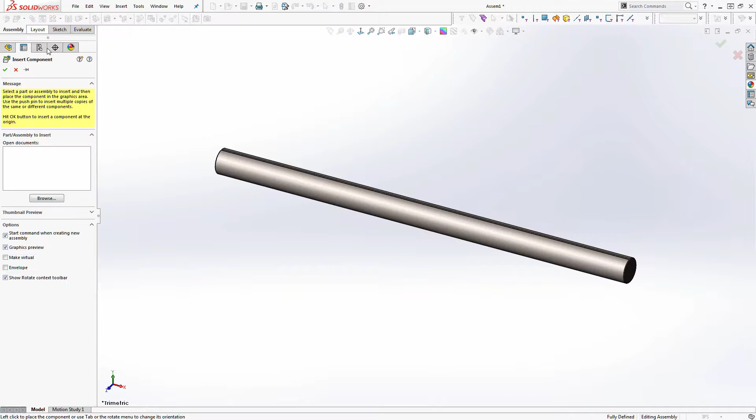So one of the things I don't have figured out yet is how I'm going to tension this thing exactly. I've got these keepers, and I'm going to get my blocks and all kinds of stuff on here. I wonder if I can select more than one thing.

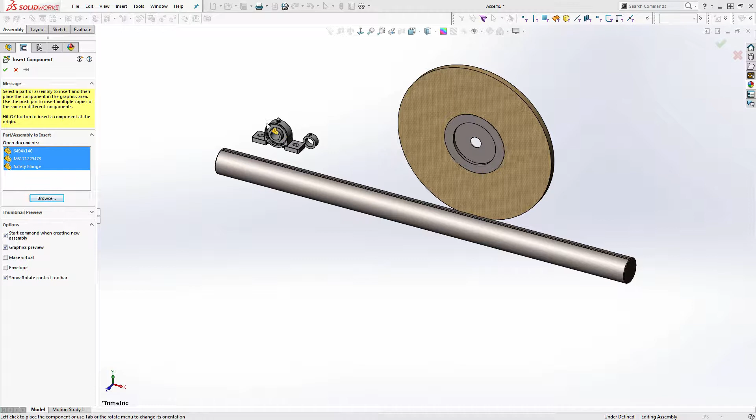Hey, look at that. Honestly, I've never done that before, selected multiple parts. That's awesome.

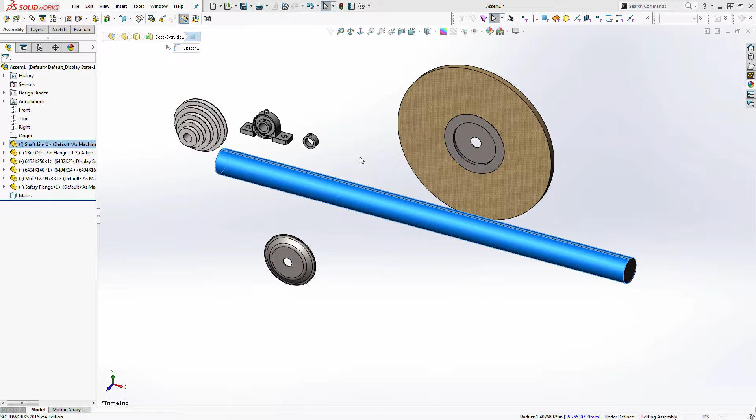It keeps asking me if I want the as-machined or as-welded state for the weldments that I made, and they're not real weldments. So this shaft, if you remember, one of the things I forgot to do last time was size this shaft, so we'll do that real quick. Obviously this is a 1-inch diameter shaft. And my keyway looks better now.

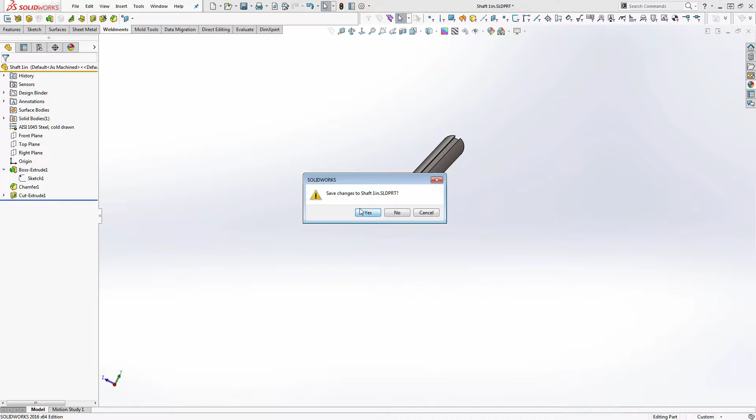So we'll go ahead and start plopping stuff on the shaft here. Let's see, did that go the correct direction that I want? Yeah, I want the set screws on the inside. And mount the pulley.

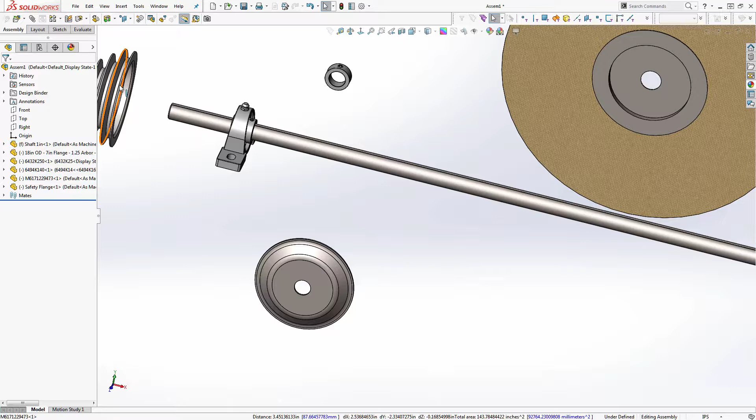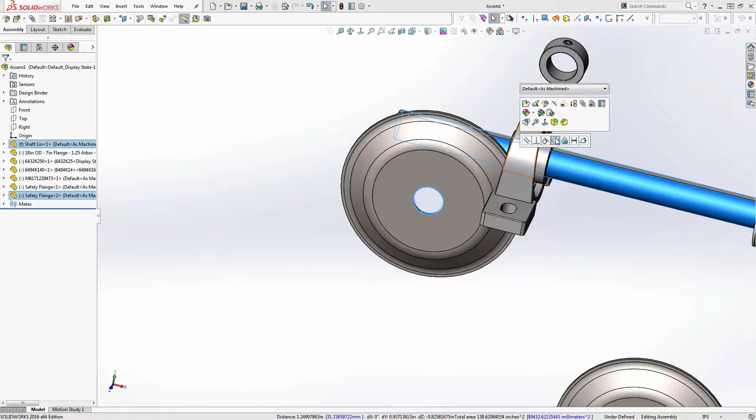Block. Wait a minute, do I just want to mirror it? Maybe I'll mirror that. Now these keepers, what we've got is I need 2 of those per side. These keepers are going to go - hey, it went the right way, love it. So my keepers are going to go up against the safety flange, and I don't know whether or not this key is going to be enough to keep it in place.

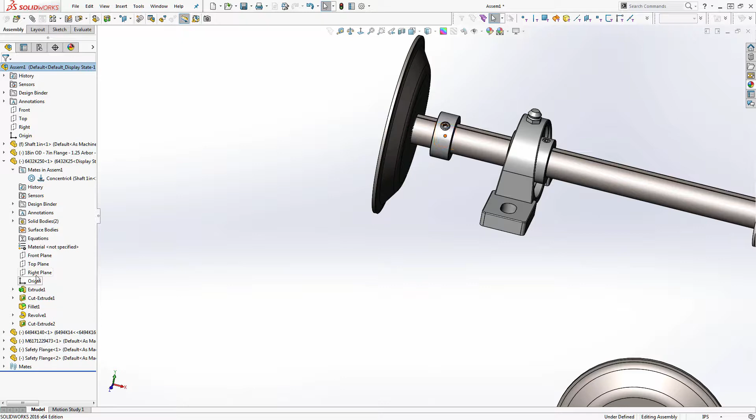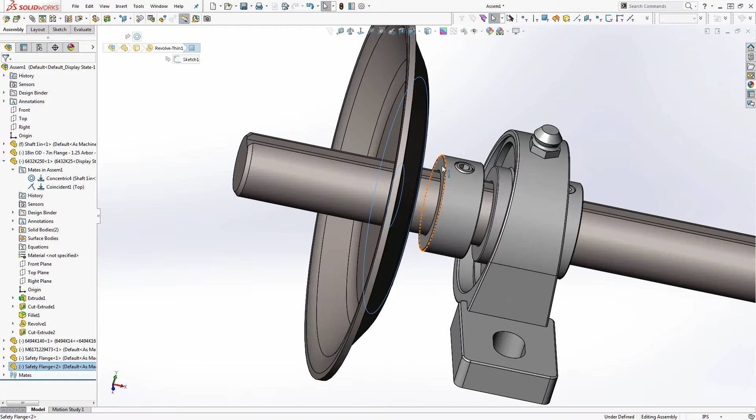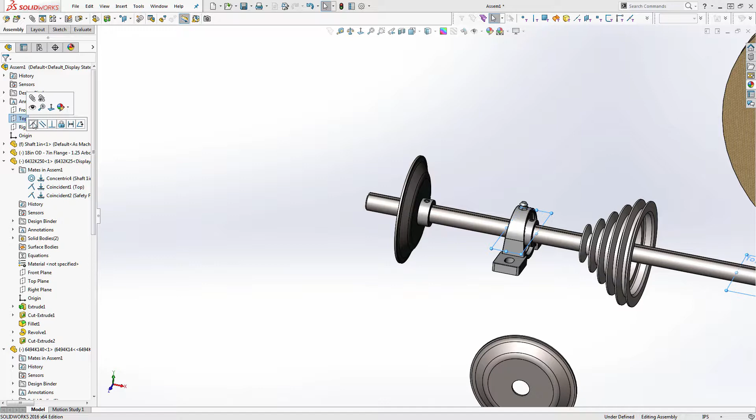Top plane, top plane. Hello, why are we not mating? Top plane, top plane. Face to this face. I still have yet to clean up some of these purchased parts and make sure they're the right size. Oh yeah, let's see. We want that to be parallel. Or I might have gotten lucky. Hey, right on.

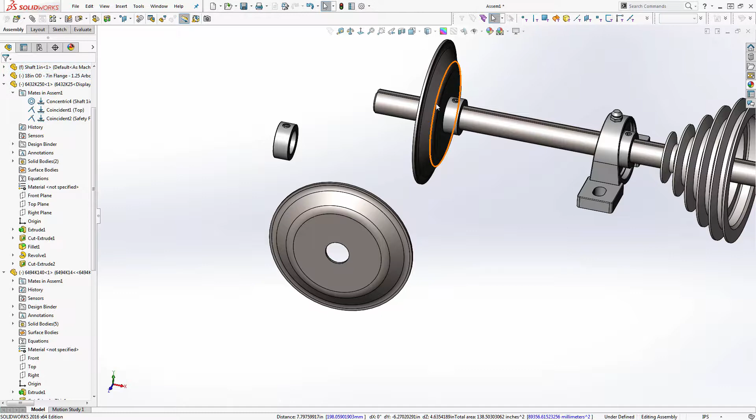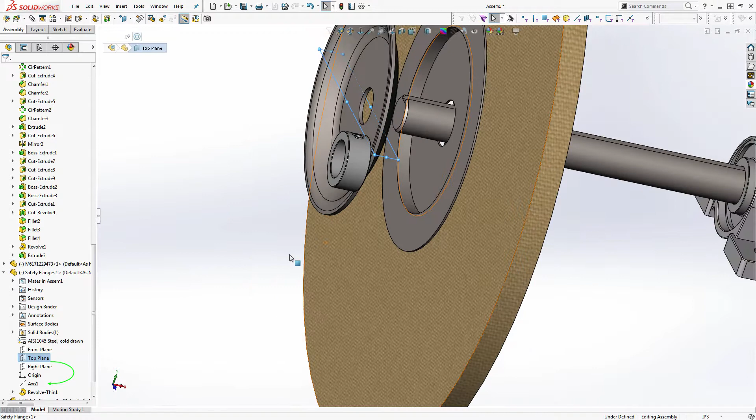So then we're going to need another one of these, and this is going to go on there. I should actually be mating these to the shaft because the shaft rotates, so that was a little bit of an oops.

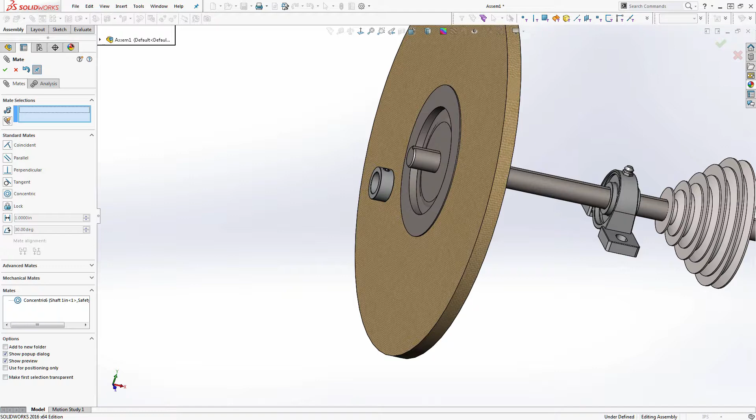I wish that they would - I'm sure hopefully they fixed it in the new SolidWorks where you can affect mates without having to go into the mate dialog box.

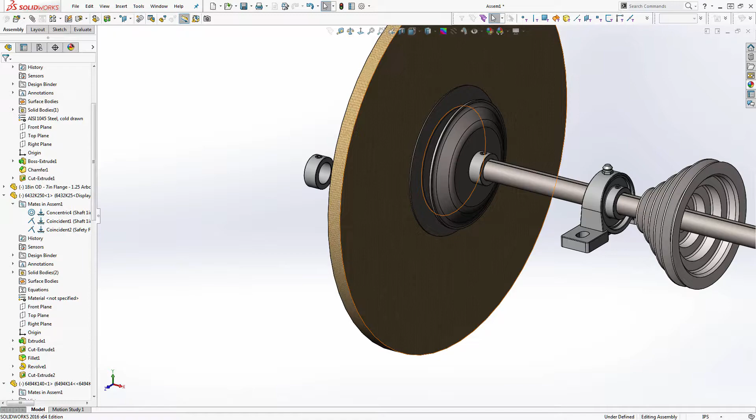So real quick, we're gonna go back to, let's see, we're gonna go coincident, and instead of doing top, we're gonna go top of shaft. Is there another one? This doesn't rotate, so we're gonna leave that the way it is. We're gonna make this top plane to the top plane of the shaft.

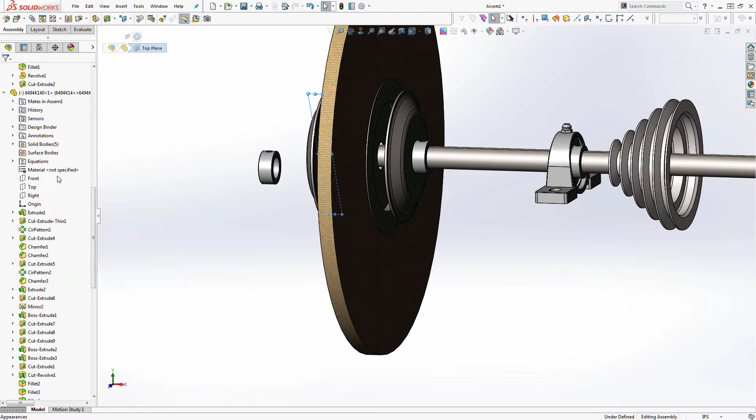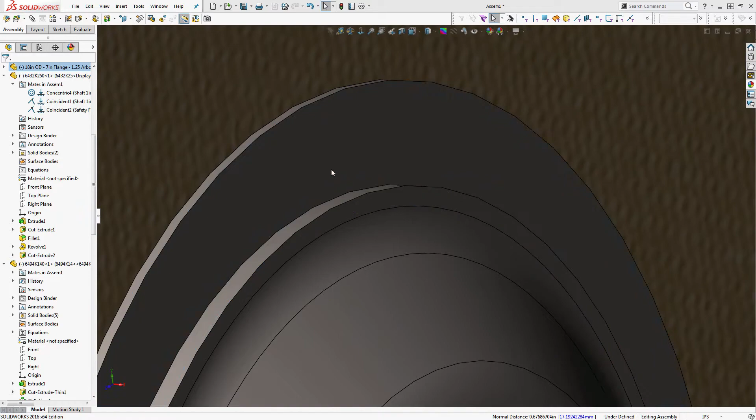7-inch centering ring. What's my centering ring at? Maybe it's 6 inches. Maybe that's the problem.

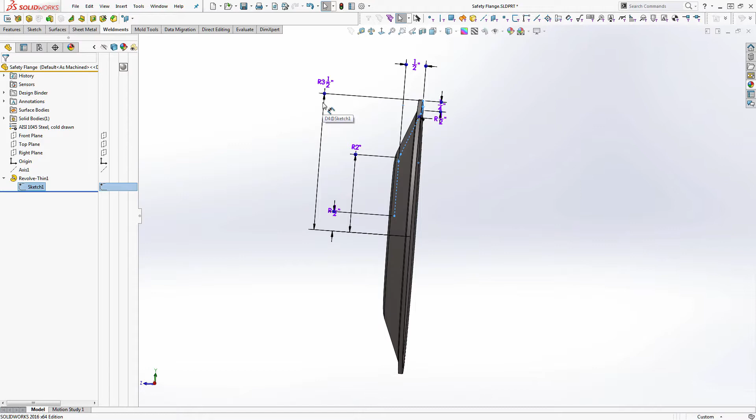Alright. Fixed. It's a miracle. So what I think I'm going to do on this shaft, I just haven't quite decided yet. We'll see how tight I can get it just by manual, just by pressing it.

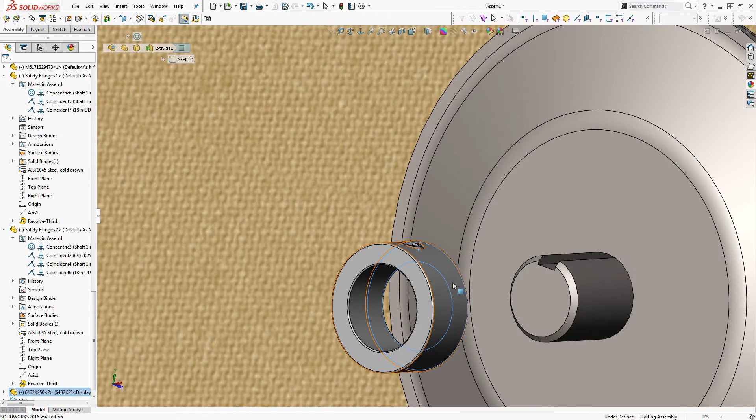I think what I'm eventually going to do is actually tap the end, put a hole in the end and tap it. Top plane of the shaft. And then...

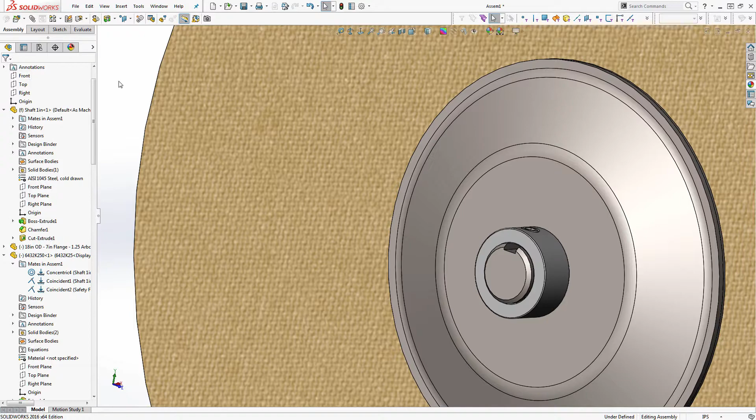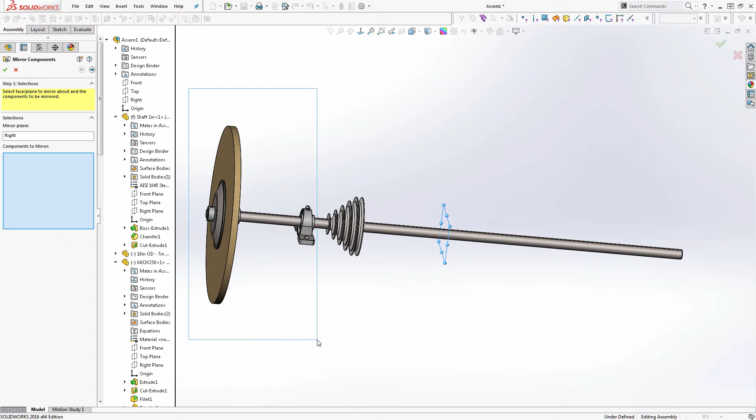I'm gonna mirror everything over. We've come up on our next 10-minute mark, so we'll do a quick mirror and then we'll be out of here. Mirror. Oh, mirror plane, right. Correct. Okay, components. Done.

So we're up on our 10-minute time here, so that's kind of where we're at now. I gotta decide on my spacing between the pillow block bearings and all that good stuff, but this is kind of the start here. I'm thinking that maybe that 1-inch diameter shaft may not be big enough. I'm gonna have to move these out, like maybe like that. So geez, though, then it puts the pulley maybe like - we'll have to see. I think I'm gonna divide it into thirds.